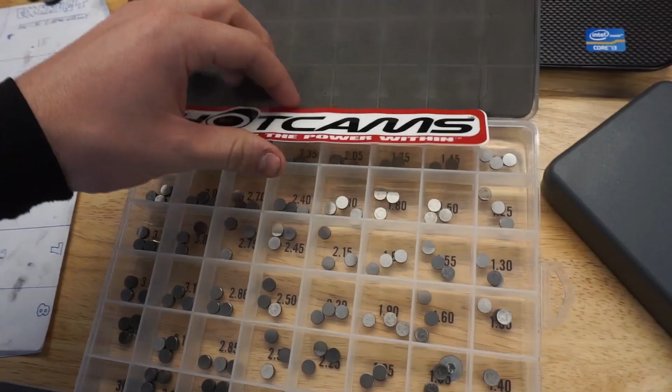If you have a 2009 to 2012 ZX6R, you need a 7.48. That 7.48 millimeters is the width. So these are all your shims, they have different amounts. It's the width, not the thickness. So the width you need is 7.48. You could go with any company.

I just use Hot Cams mainly because Sean Nielsen puts it in his RSV4, and if I know he's putting it in that, then I know that these are good. If you look really closely, they do have numbers on them. Some of them do, some of them don't.

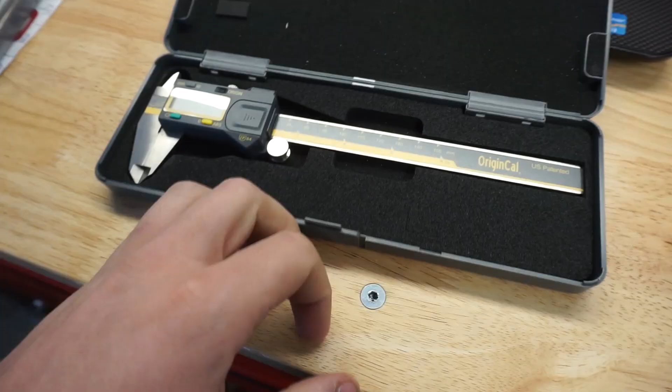You'll also need your measurements and your paper, and you need a micrometer, however you want to pronounce it. I did a YouTube search on which is the best one, and iGaging apparently is the most accurate.

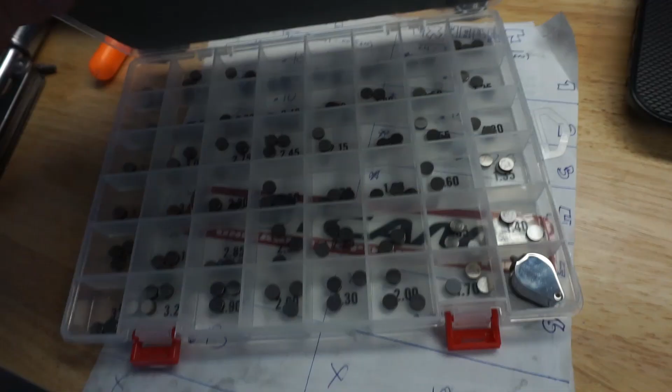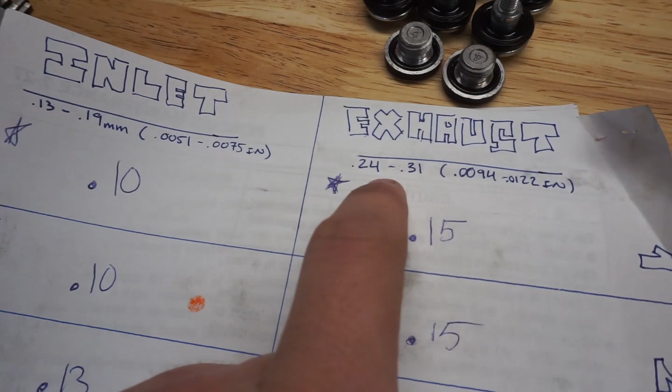You may need more. For example, this is what I was worried about. I have 0.15, 0.15, 0.15, 0.15 — 4 times, yet I only have 3 shims. So I'm going to have to do one of two things: just hope that there's another OEM shim in there that I can use, or go to the top of the spec range that it needs to be in. So instead of being dead center between 0.24 and 0.31, I could be at 0.3 instead. That's something I can do as well, as long as it's within spec — that's what you want.

They also provide a little magnifying glass. I'm doing this all over again for the third time. Yes, I know it's overkill, but I just really want to make sure since this is my first time doing it. I'll get back to you guys.

I taped around this bit because it's a T45 bit for putting it on top dead center. I taped it because it was starting to scratch the threads on the outer side, so make sure yours doesn't do that. So now I've doubled and then triple checked all of my measurements, and they all line up perfectly — this is exactly what I measured.

So now the next step is we need to adjust the valves. What that means is all of the tappets — there's 16 of them — have little tiny shims. This will just keep spinning, right, as this goes down, and then it'll come up, as if this is the cam lobe. And if this tappet is getting too tight or too close to this, not only will it wear out the cam lobe, but it'll also ruin the finish on the top of the tappet, and it's just bad for your engine. It doesn't run as smoothly.

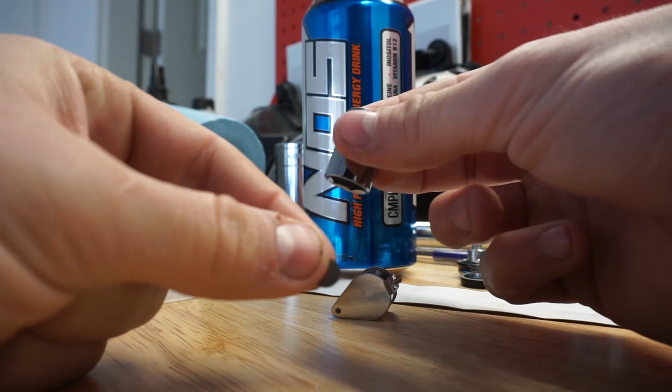So in order to put it back in spec, you would take out the shim out of the bike, and if this is too big, you would put it back in your kit — so 1.4 — and then we would get a smaller one, which I just grabbed. So then, let's say 1.4 was too thick, then we would go down to a 1.3. That way this isn't hitting the cam lobe.

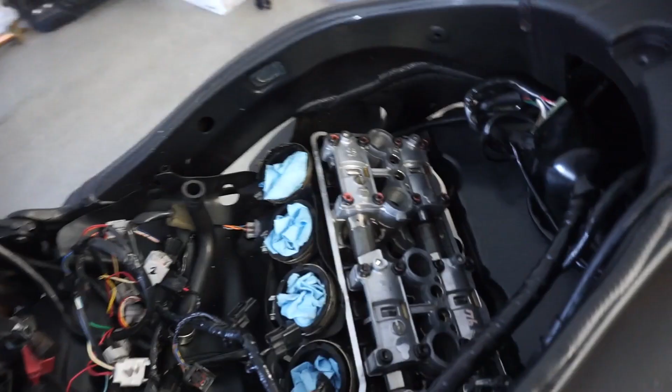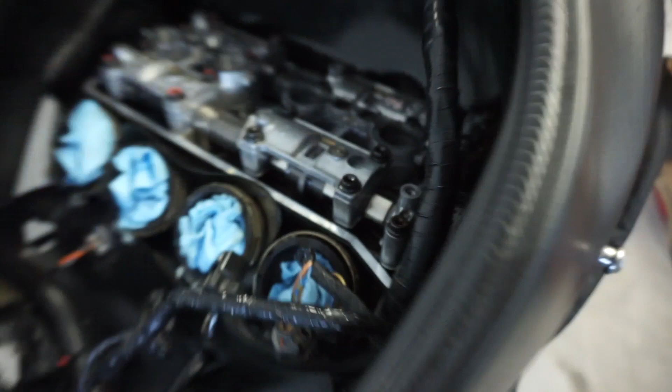In order to take off these caps for the camshaft, it's all under tension. It's really, really stiff, spring-loaded tension. So what you want to do is loosen up this cam chain, and by doing that you go right here — this is your cam chain tensioner. You're just going to loosen this up and completely remove it. It's going to sound like it's clicking, kind of like a ratchet — remove it all the way. That way it will release the tension on this cam chain.

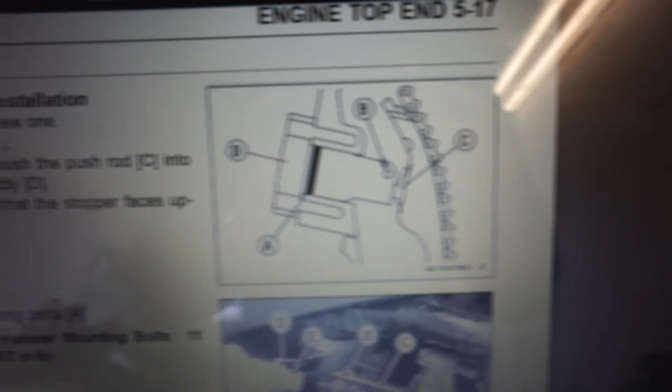There is a specific order in which you take these out, so fair warning, I'll pop this up on the screen — that's the order you have to take them out by. They have them numbered 1 through however many there are, and you remove those in that order so it evenly comes up and doesn't just spring-load the camshaft along with the cam chain. So that's what your cam chain looks like. You've got your 2 bolts on the outside, and then there should be a middle bolt.

So what it does is it pushes, so the stopper presses up against the cam chain as this loosens over time. I don't know when the exact mileage is when I should replace that, but I'll look into that later.

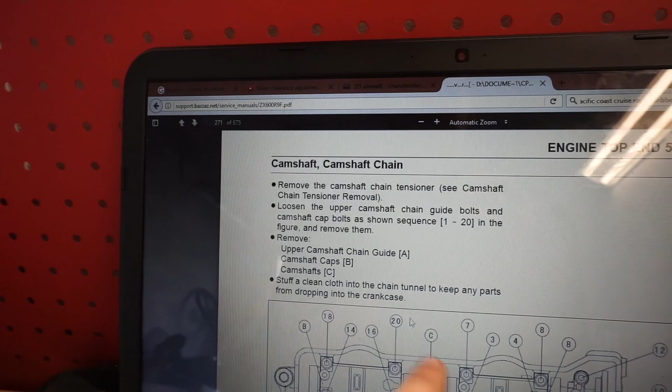Right here, this is the order in which you have to remove it. And the service manual explains everything. So remove the camshaft chain tensioner, then loosen the upper camshaft chain guide bolts and the camshaft bolts as shown in sequence 1 through 20. So there's not 24, like I said, there's 20 of them. So you would remove the cam chain guide first and do it in the order that it tells you.

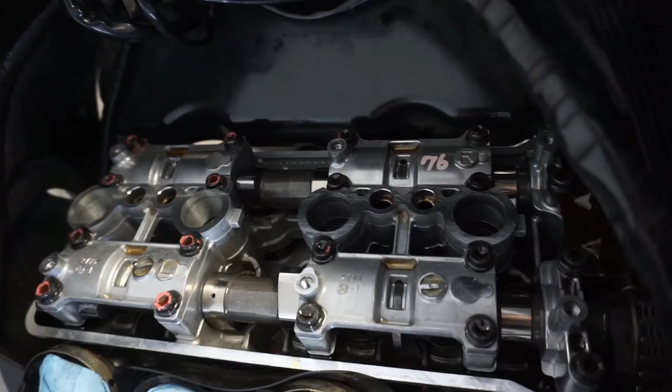So we'll start with bolt number 1, then bolt number 2, then 3 and 4. But also do this first, the cam chain guide. These are all the same bolts, so it doesn't matter which order you place them in, but if you want to be careful about it, go for it. You can't really mix these up, because if you look right here, it says R. See how it says R right there? That lets you know that it's the right camshaft cap. So just keep them in order so you don't mix them up.

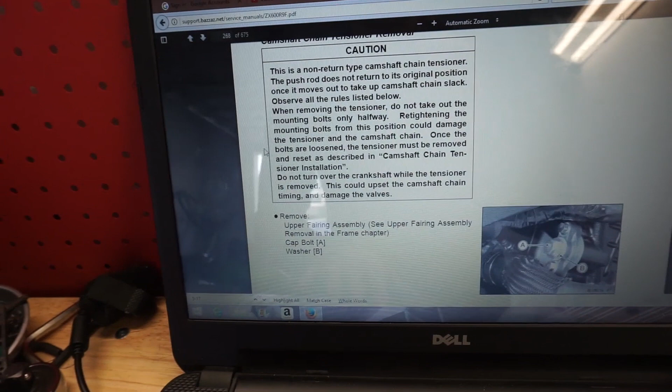It also states that it's a non-return camshaft chain tensioner, so it's not going to go back in the spot that it was. You're going to have to reset it once you install it, which the installation is right here, and it'll tell you how to do that. So this is a 12 millimeter.

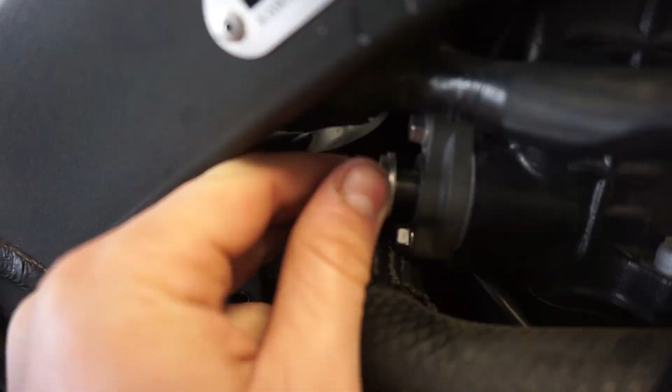There you go, the spring and rod, and then put it in a safe spot. Now we can remove these mounting bolts. Thank you, Kawasaki, for putting all this in the way. Move these, and I'm going to turn off the camera because it's so hard to do this with one hand.

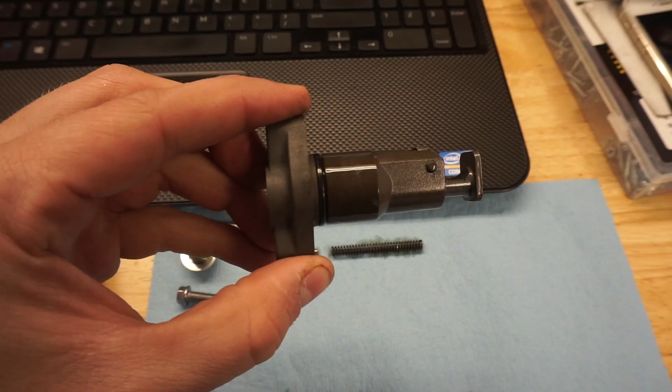Alright, there she is. It is the CCT, or cam chain tensioner. So I just kept it in the order that it goes in. I have the top bolt and then the bottom bolt. Just keep in that order, and then don't move it.

Ridiculous! I got a strip bolt from the Allen key. It would not come out. Oh, it was like I was on my last bolt. Wish me luck, I've been at this for like an hour. It's ridiculous. This is probably why mechanics charge so much, because shit like this happens. So I'm gonna chisel it and hopefully I can get it undone. I've tried everything, I've tried the star bit, I've tried an Allen key, I've tried freaking everything. So this is my last bet.

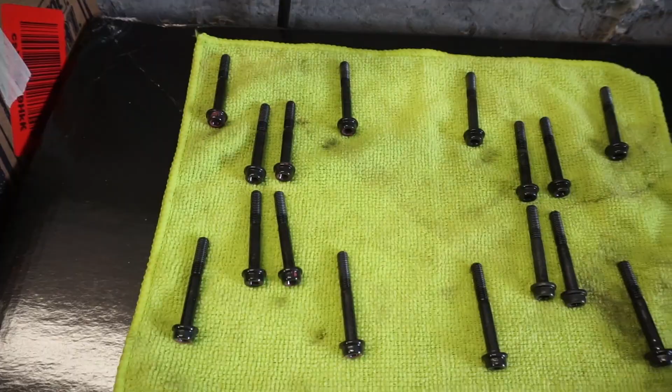Okay, so now all the bolts are taken out, and the same way that I took them out, I'm just gonna do that to be safe, just because I can, and I'm OCD like that. So I have them all in the right order.

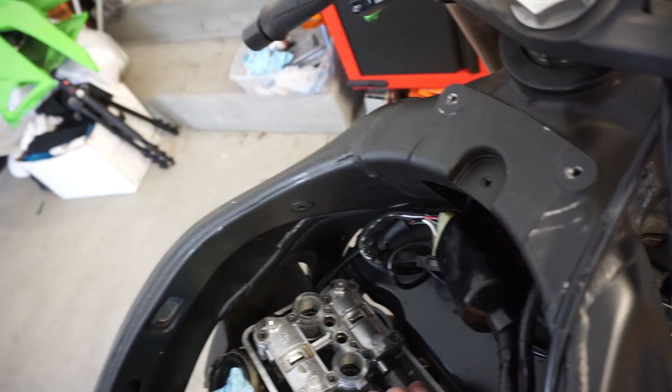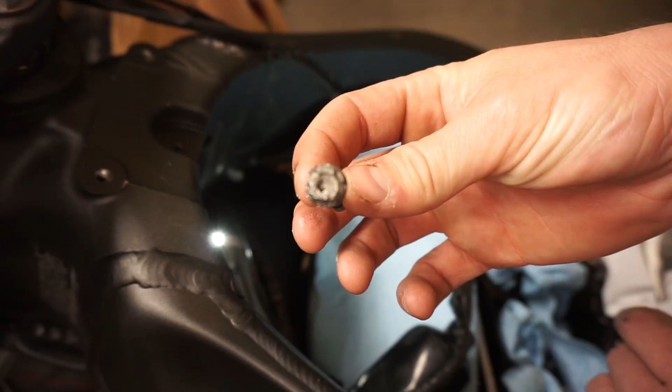Now that we did A, we're gonna do B. Yeah, I'm gonna do this with 2 hands, my hands are all slippery. Little fucker. Sorry, it's just been hell trying to get this thing out. Yay! Gosh, just look at that. I'm not even joking, guys, this took me hours. Hours.

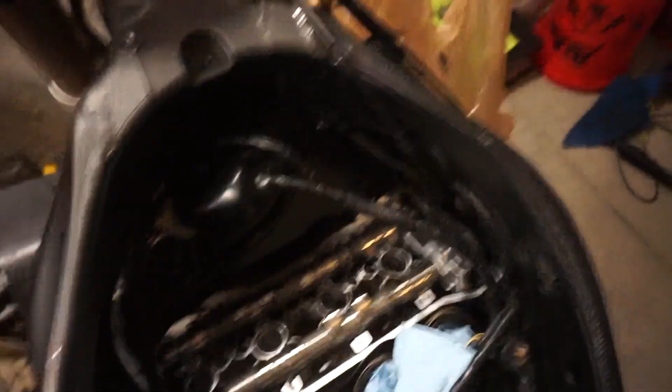Now that I have, as you can see, I've gotten the cam caps off. They're just sitting right there. You have these, when you take the caps off, you've got these rubber seals, 1, 2, 3, and 4. Make sure you clean those. I think 2 of my spark plugs had just a tiny bit of oil, which I actually believe was just a spark plug itself, not the actual O-ring.

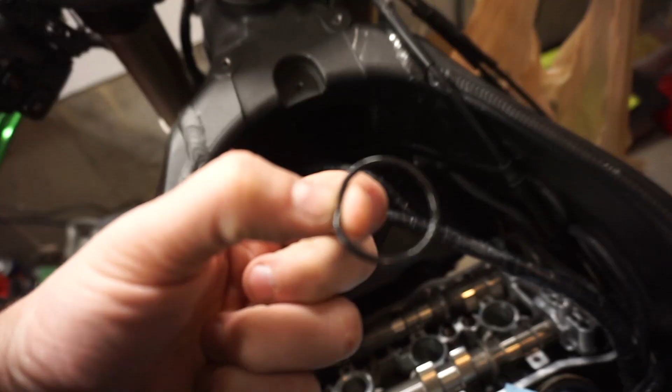So go ahead and inspect those, make sure there's no cracking. These look pretty good, they did a great job keeping out dirt. Once you're done with that, remove those, and then you can remove this camshaft. And remember that you have to keep this in a specific order, so remember that, and I'll show you guys how to do that.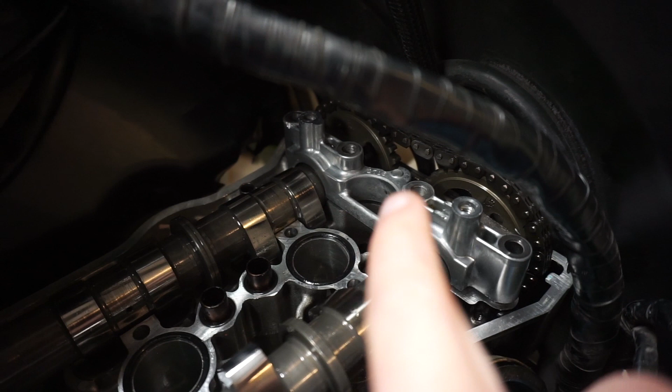Alright, so we got almost out. So you'll see how this circle is smaller than that circle. That's because these circles right here have pins in them. So make sure for one, you don't drop it in there. And then two, make sure you put them back in the order that you came from, just to be safe.

My village is being raided.

Okay, so as you can see, I have marked with a Sharpie just 2 spots on the chain and the sprocket itself. You have to focus there.

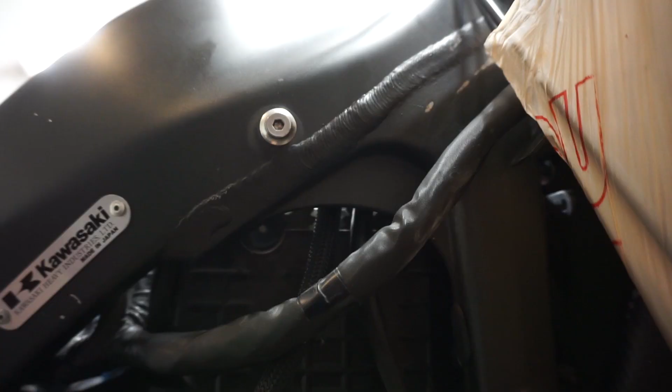So that way I know that's where it lines up, so that is critical. If by chance you do just take it out, you'll probably have to take the engine apart, unless you might be able to see. You would have to line up the little notches on the sprockets, which are really hard to see from this angle, but you would have to line those sprockets up with piston 1 and 4 like before you took all these off. Make sure that stays in that order.

Then the next thing I'm going to do is hook this chain up to probably my handlebar and just hold it so it doesn't drop down into the engine. Then also count your links from your furthest notch. So there's this notch and then there's this notch. Not counting the marked ones, we got 1, 2, 3, 4 in between each sprocket. 1 link, 2 link, 3 link, 4 link.

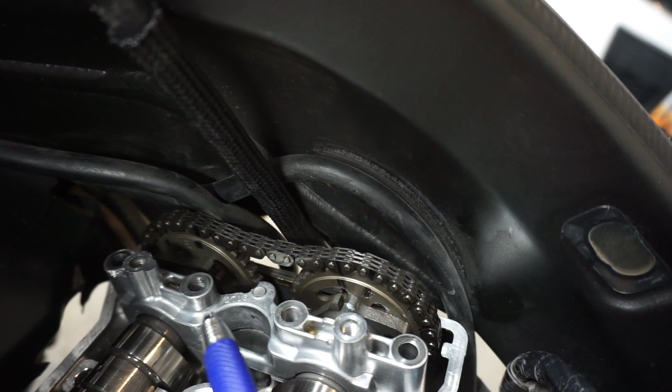Okay, lo and behold, we have our tappets or our buckets. So that's what they look like, they're like polished heads. Underneath these are little shims, and I'll show you here in a second.

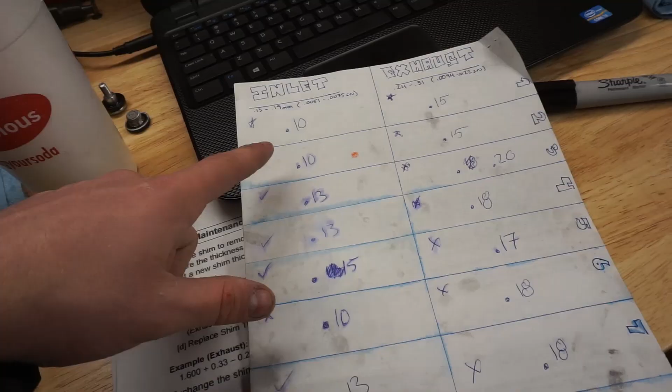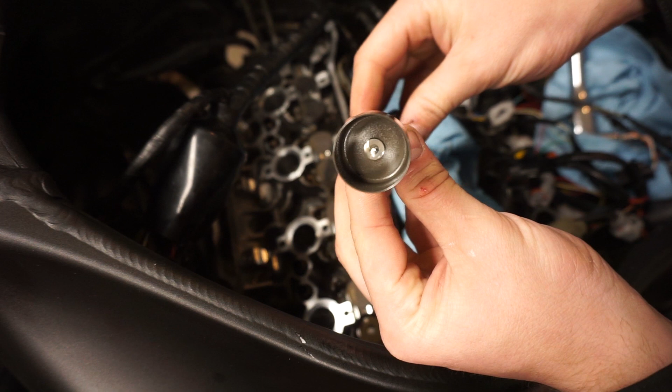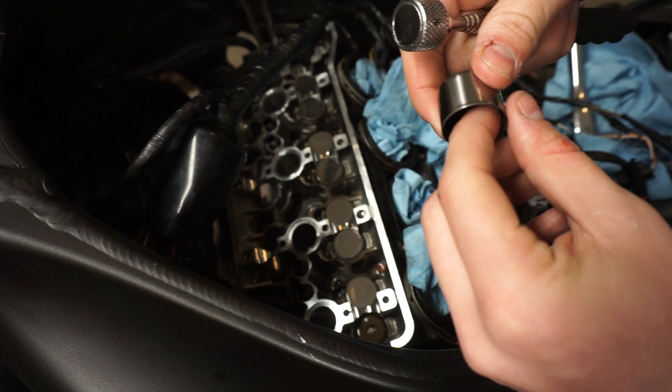You then take your magnetic tool, and underneath you have your shim. That little tiny thing is a shim, which raises or lowers this bucket. So we're just going to remove that and take the shim out. And that right there is your shim. So we're going to go ahead and measure that.

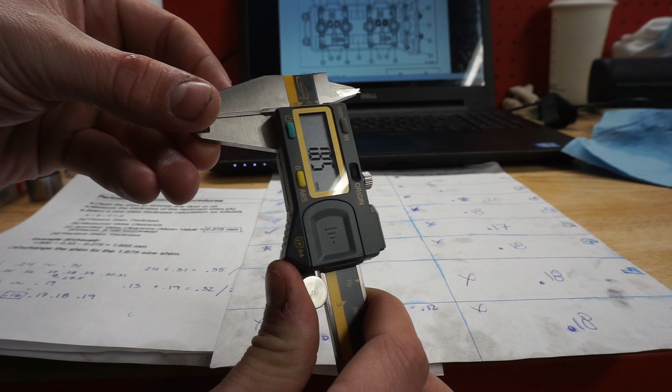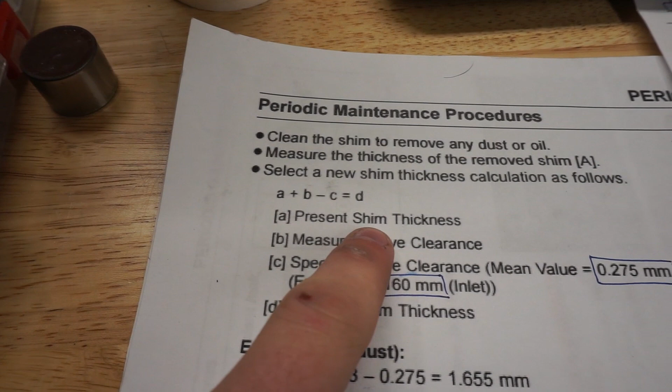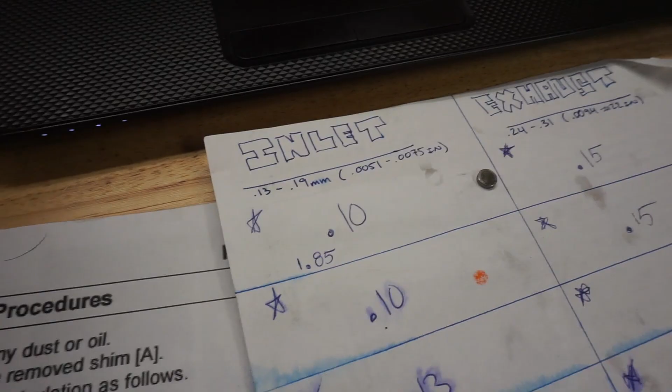So we have A - A is our present shim thickness, which is the little shim we just measured, which is 1.85. Now my measured valve clearance, which is the first thing you did, is going to be this first number - the first number that you measured, which is 0.1. We're going to do 1.85 plus 0.10, minus - and the minus is this number that they give you. They give you 2 numbers. So then we're going to go ahead and minus it from the average.

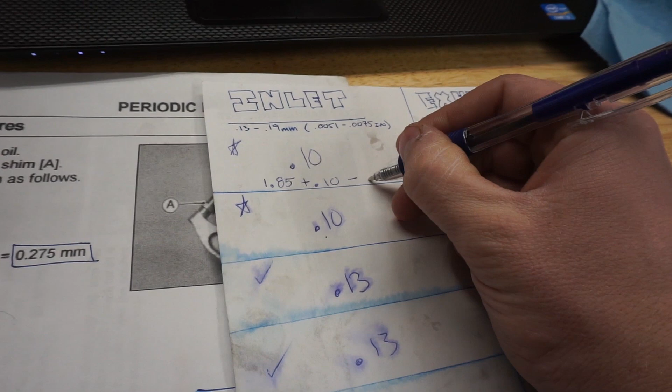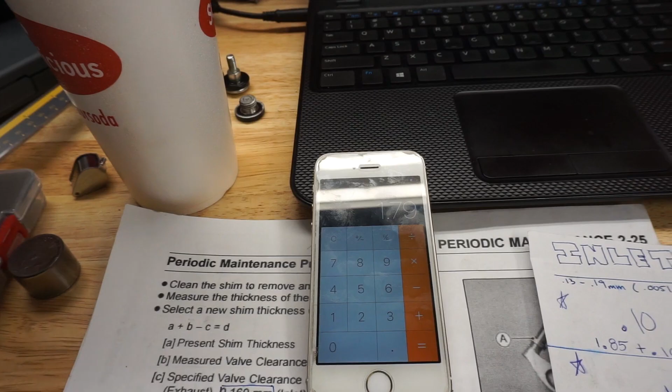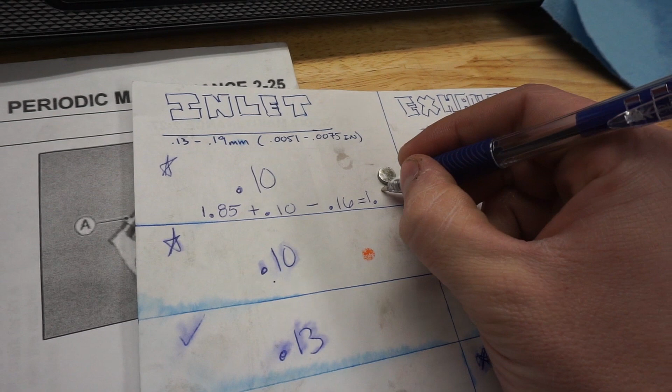0.16 equals 1.95. Then we're going to minus 0.16, which is equal to 1.79, or in other words we'll just round up to 180. As you'll look on these numbers on the shim kit, 1.8 is your new measured thickness. So you look on here and it will say 1.80. Now that you have that, you're also going to measure that again - take that, and so it should be 180.

And there we go. So you now have your new shim, which is this one, and what you're going to do with this one, which is 1.85, you're going to go ahead and put it in the 1.85. I now have 4 of them. So there you go, that is how you do it.

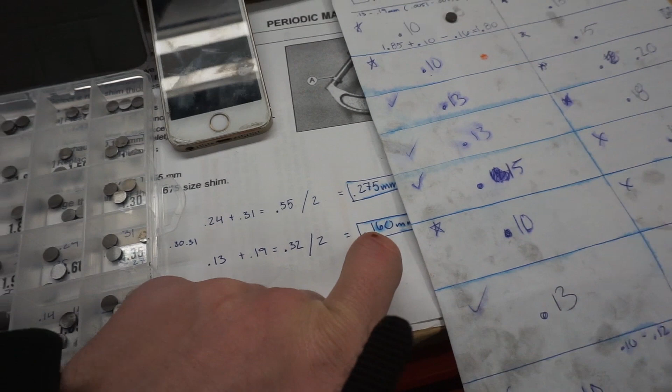We're going to do that exact math for the inlet. Focus on one at a time - focus on the inlet first and go down your list, and then work on the exhaust. You don't want to be bouncing back, because if you mix up the average numbers, the 0.275 and the 0.16, if you keep bouncing back you'll get mixed up for sure.

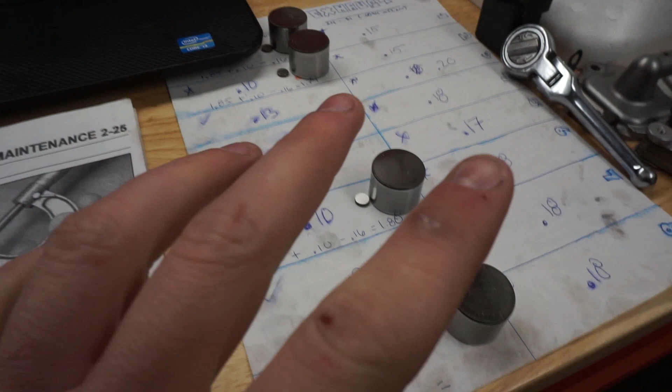I'm super glad that this happened - I'm just doing this for an example. You would technically just put this back in the engine, but I'm just showing you guys. So I had 0.10 four times, and my shim kit only comes with 3. Luckily, on this 8th bucket my measurement was 1.82, and you can see there is just a little number 2 there, so it's going to be 1.76.

We're going to go to the closest thing, which is going to be 1.75. If there is no valve clearance, use a shim that is a few sizes smaller and remeasure the valve clearance once you put it back on.

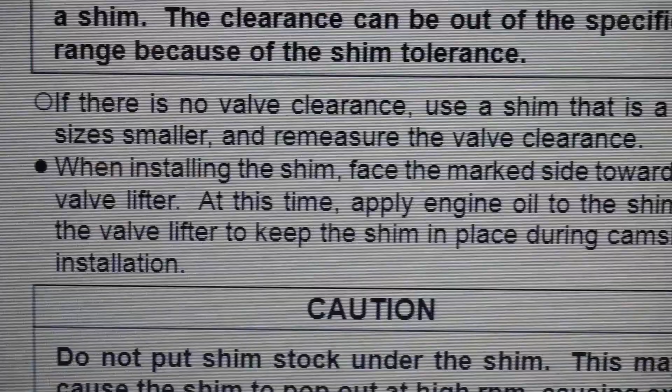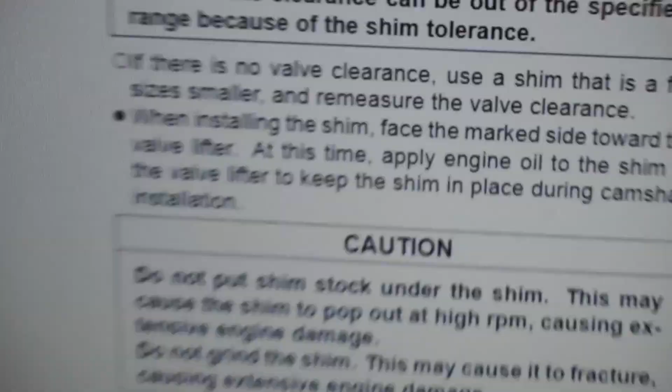When installing the shim, face the marked side toward the valve lifter. Apply engine oil to the shim and the valve lifter to keep the shim in place during camshaft installation. So there's number sides, right? The number side is going to be facing down, so we're just going to grease it up in some oil.

This was for measurement, bucket number 8, and this is 1.75, just to double check. And we're just going to ever so carefully, not mess this up. Now you can see that is your shim.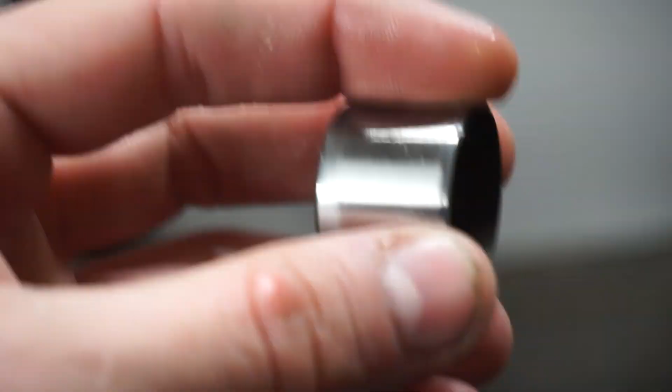So it's going to sit right on top of that. You're going to take this, rub some oil on it as well. I'm just going to dab my finger in there and get some oil all over that, then run it over the bucket, and it just fits right back into place.

Ah, so satisfying. Okay, so that is what a valve adjustment is, guys. So we're going to go ahead and continue.

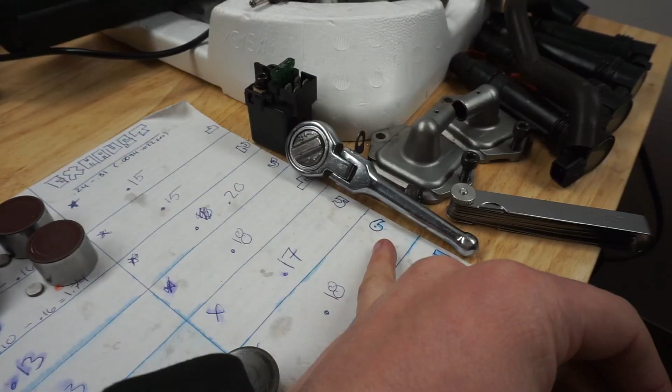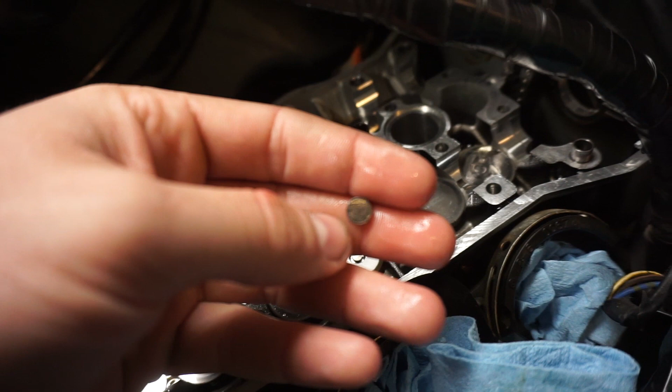So this is my new shim. Put some oil all around it. Lifter number 6, so I know this one's 8, 7, 6. Remember, number side up, as you can see. It's going to face towards the valve lifter. Get it on the bucket.

You just ever so slightly lube it up. However she likes to do that, it depends. Every girl's different. And then you'll notice it slides in really smoothly.

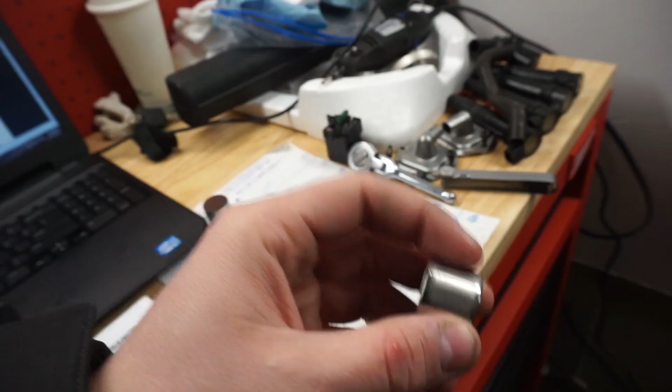Lifter number 2. So the purpose of the oil is so that it will stick, so when you're putting in the new camshafts or reinstalling the camshafts, they're not going to wiggle around. That's what you don't want. I'm sorry I'm beating this to death, but some people really need a lot of detail when it comes to stuff like this. Some people are mechanically inclined and just naturally know what to do, and that's how their mind works. Some people not so much, and they just need a little more clarification, which is totally fine.

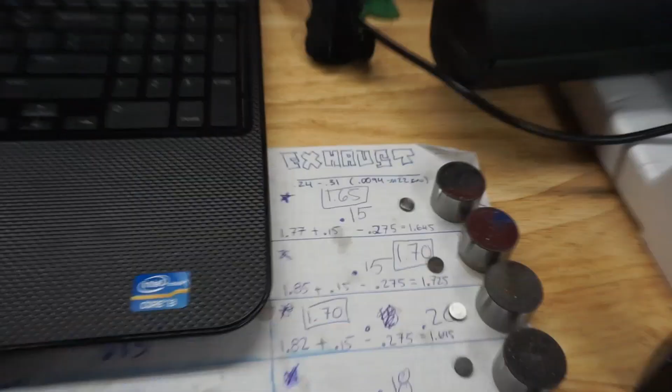And that, my friends, is the inlet side. So for the exhaust valve, I've got all my measurements here. I'll go ahead and just scan through those so you guys can look at them yourselves.

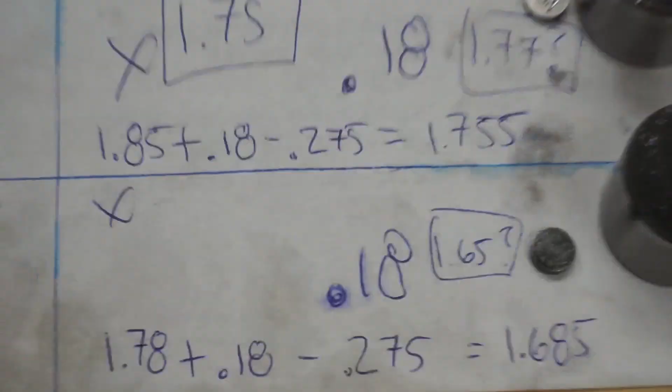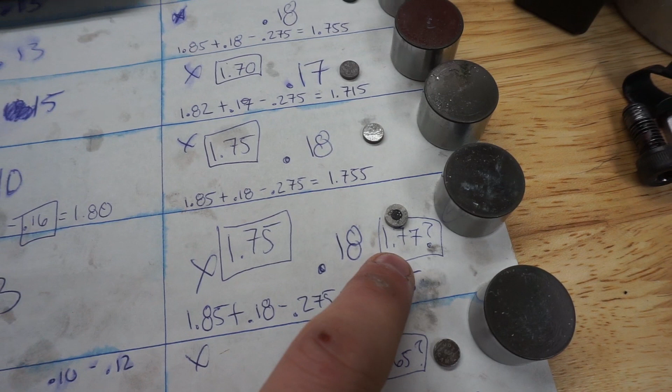You'll see on these last two I got a question mark next to these. I did not have a 1.75 left, which is right here, and I did not have a 1.68 in my leftovers because I have increments of 0.05. So I put the closest thing to it, which is 1.65, and the closest thing to 1.75 I had was actually what came out of the engine on another bucket. It was 1.77, 1.78, give or take. So it's off by 0.02, 0.03, give or take. Same with this one, it's off by 0.035, so really not that big of a difference.

Once we put these tappets back in, it's the same process for when I was putting these in. Make sure that this cam chain keeps tension, because you do not want it dropping down into the deep hole.

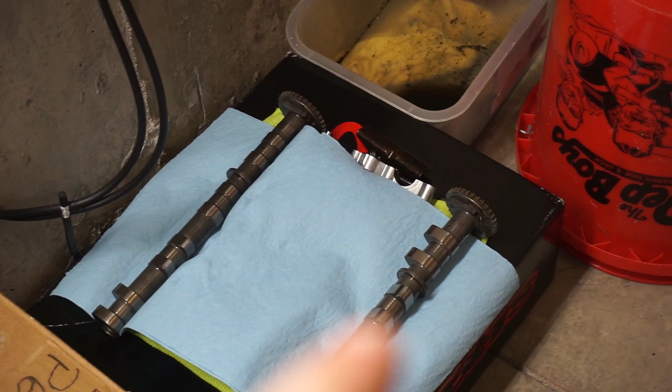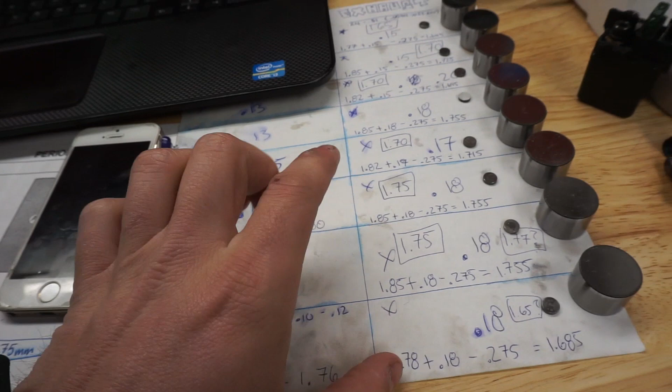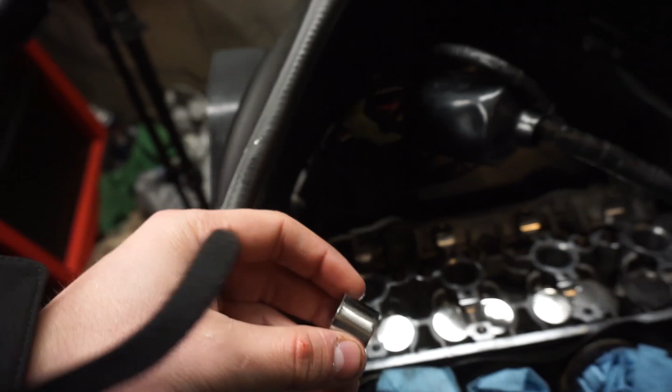Well, I'll do it, but put all the tappets back in. I'm having trouble with one hand. You also want to be inspecting these, make sure there's no chips in them or anything. It's fine if it looks like it has a little bit of wear on it. Okay, so I'm doing this third one right here.

Slides right in. So yeah, just want to double check, make sure that there's no wear and tear. So my sheet is cleared, and I now have all of the shims and the tappets or buckets all back in place.